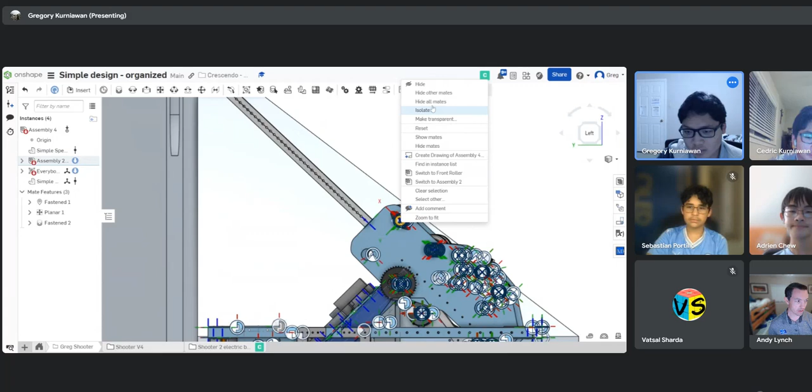Different. Wrong one. Yeah, it's the pointing pole.

Here's the sketch I was working with before. Essentially, I guess I should explain the whole idea. Let me open the other tab. Sorry, the CAD's kind of a mess right now, but I'm slowly figuring it out.

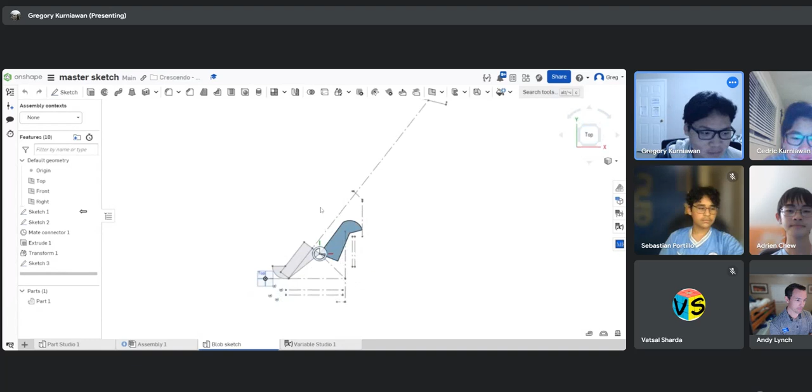Here we go, here's a blob sketch. This is something you said, Mabe. Essentially, we're gonna intake the note up, and it's gonna go to the shooter like we normally do. But now, for the amp, we're gonna hold the note inside the indexing part of the shooter, flip the shooter around, drop this hood down, and then spin the indexer the other way to spin the note into the amp. That's our current plan.

So that's the video of PantherBots shooting the amp? There's a lot of videos now of a lot of people shooting the amp. I think Belair is also trying the amp, I think.

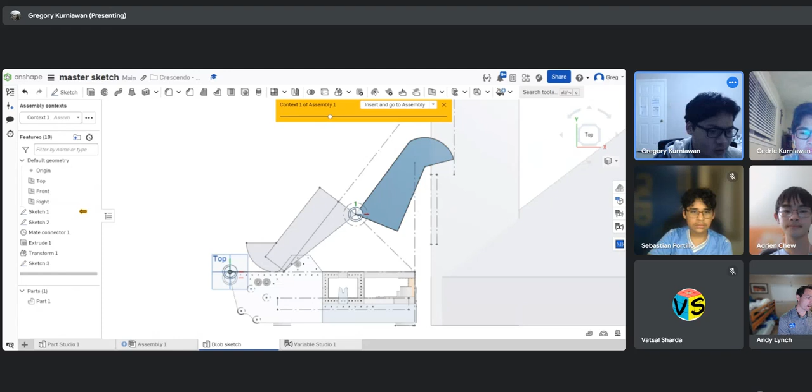Yeah, it seems like you can do it. We don't have to necessarily have a slow index, but okay, cool, I mean, looks like a good plan.

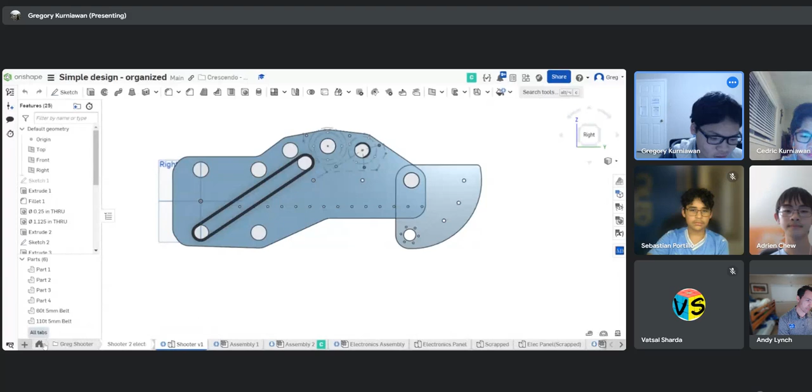Yep, I'm still working on the plates and stuff. From my just looking at it, it looks like it's gonna work. So that's good. Where is it?

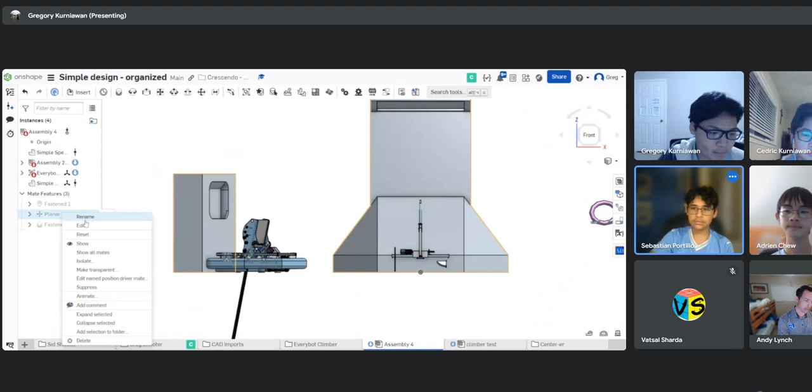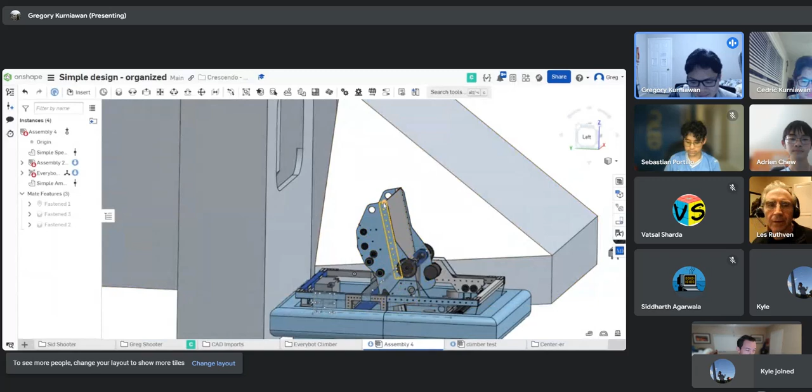This is the old pivot, so I haven't finished the new pivot yet, but just from the height I'm looking at, it should work, and also from the length, it should work too. So yeah, slowly working. Doing the belt stuff has been an absolute nightmare, but that's okay.

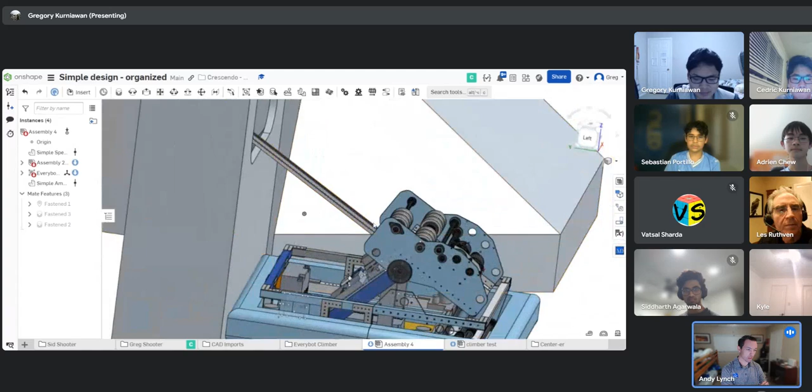So is that stick pointing towards wherever it's shooting? Is that the idea? Yeah, that's it. So can you zoom out and show us the shot into the goal?

One second, let me. I guess we should call it the right name. It would be the shot into the speaker. Speaker shot, yeah. That's correct.

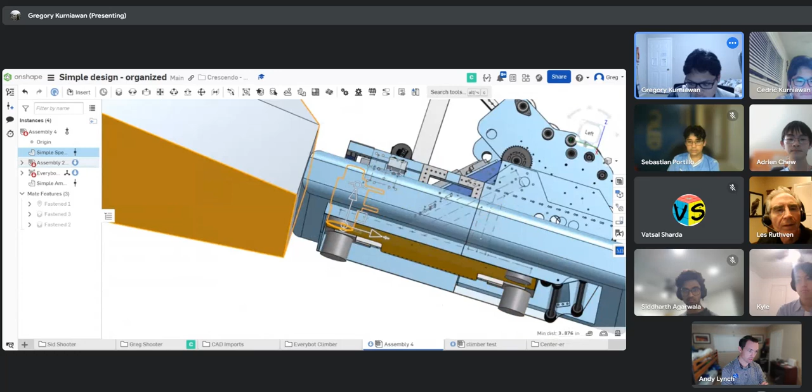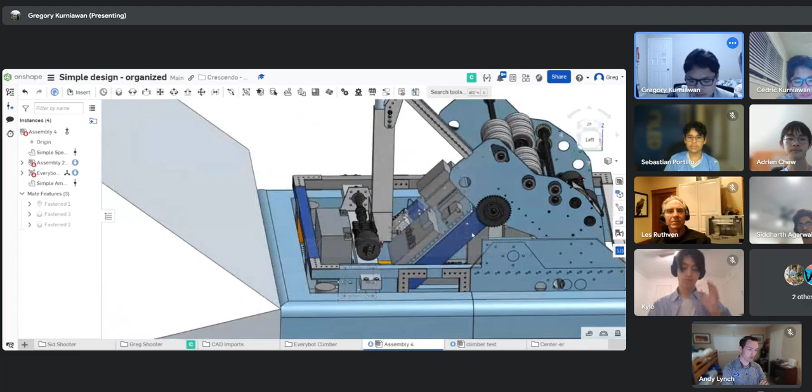Something like that, like I said, this is still the old pivot. I have to move the pivot up, probably flip it around. So yeah, it's been kind of a nightmare with the way we have to turn, basically like past 180. So I have to turn like this in order for us to do the amp stuff. So I have to flip this pivot around.

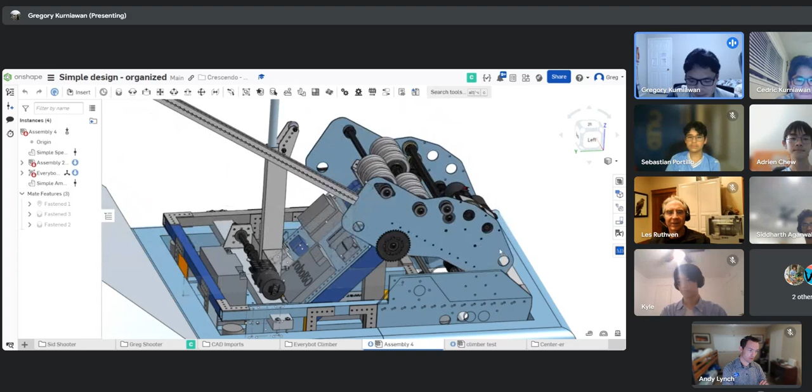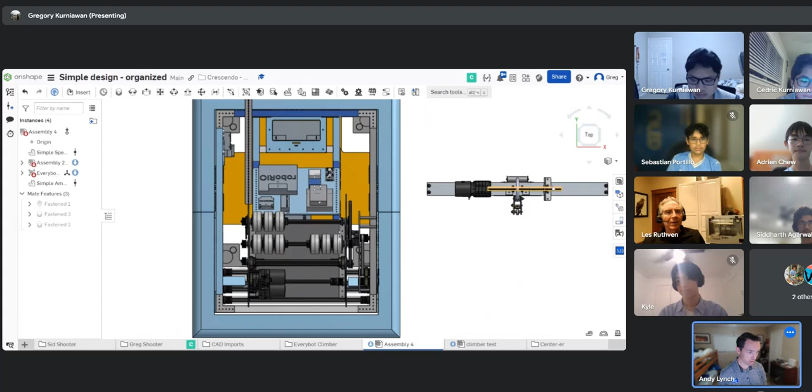Can you do a top-down view? The climbing arm is going to be, probably, I mean this is just from Everybot, so probably gonna be somewhere right here or something. We have all the space on the side.

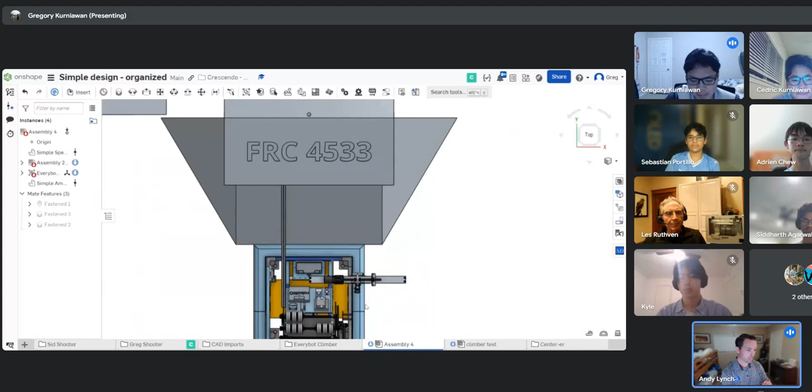There we go, 92, is that the plan? I think that's the plan. Yes. It's actually pretty similar to the Panther Bots where they have the two climbing hooks. Maybe have hooks on both sides, just like they do. Yeah, I think for most it'd be in the middle, or I think it'd interfere with the shots because the pole itself is already really huge.

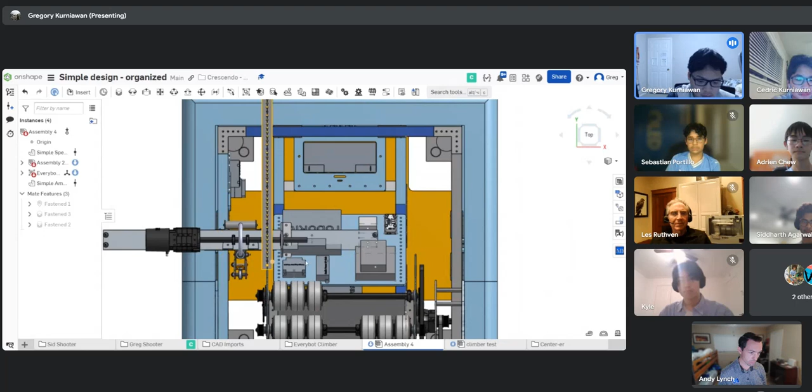See, I think we can do it in the middle. Besides, it's a bit more stable anyways. It doesn't mean we need to have two assemblies though, that's the crappy part.

There is a way for us to do it with a through-bore gearbox, but that wouldn't allow us to control the individual heights on the two telescoping tubes. I think we might as well just use one long axle, right? Yeah, we could just do one big axle with a coupler in the middle and a through-bore gearbox because we have 3 or 4 of those lying around.

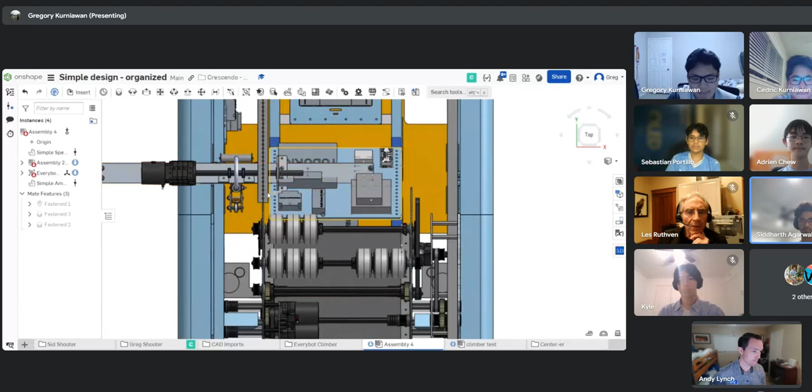Do you really want to? I thought maybe, yeah, that's the thing, it would reduce complexity, but it would not allow us to adjust for harmony hang. I thought for harmony you just pull up as hard as you can, and then that should get you as high as you can, right? Well yeah, it's just the Everybot telescopes, it's a single stage, so it probably won't get as high as some of the other elevators that we've seen.

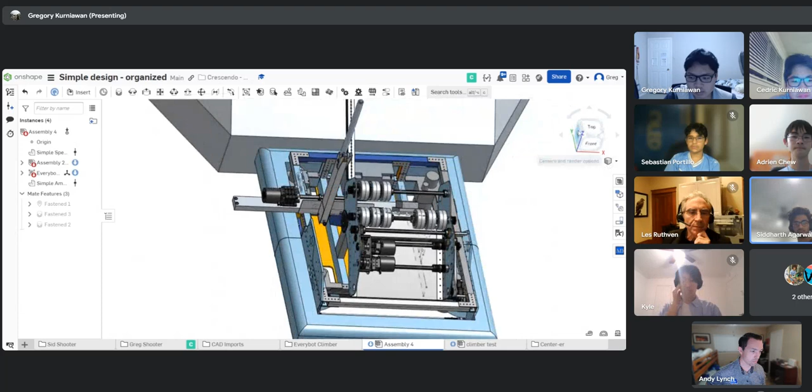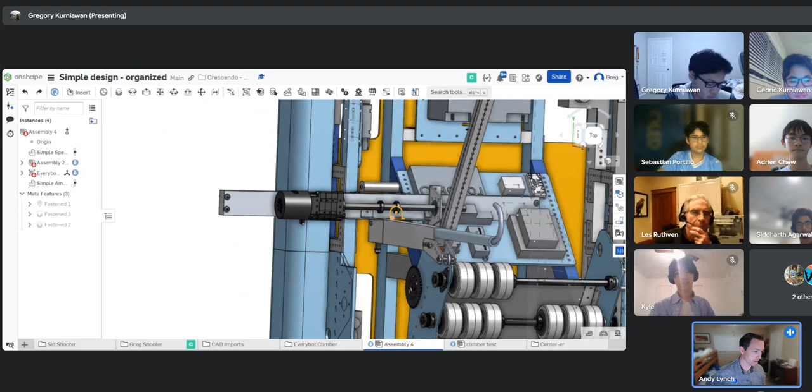Well, that would just package motors, each one, and then come up with a nice way to put the motor. Okay yeah, I think we should have space under the shooter for motors. Yeah, I say we just work on that packaging and try to get everything in there. We do a lot of shots like this where we convince ourselves we have to have pieces, bits, we have to do electronics.

This is actually building. We have to put this arm. That's step 2, yep.

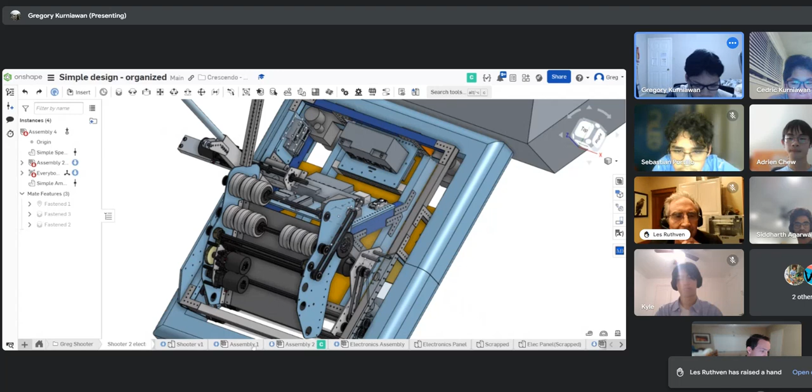Try something quickly. So you raise your hand. Les? Les, you got a question?

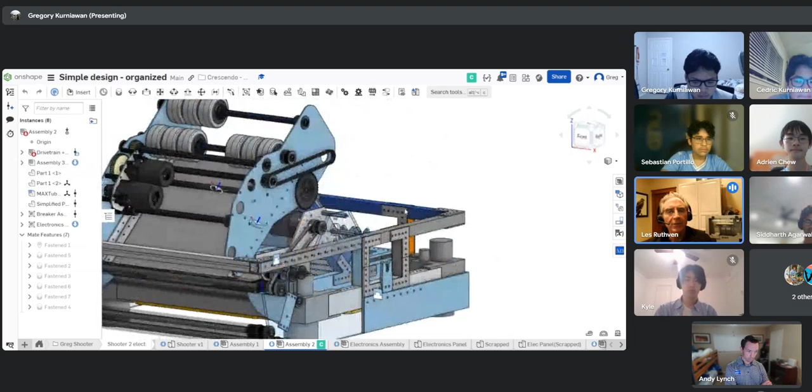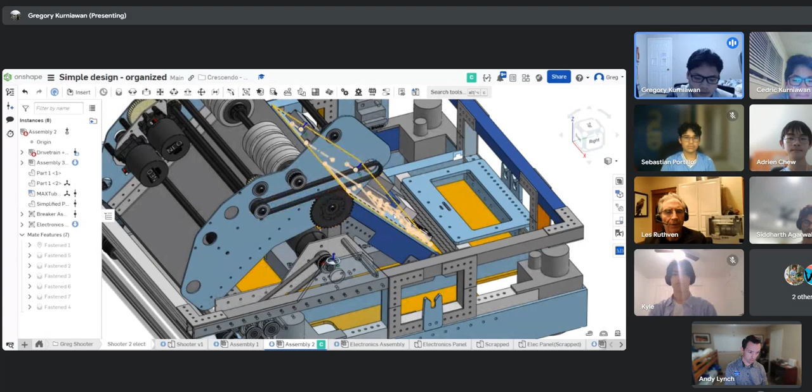Yeah, so it was about what you were saying, since you have to flip it over more than 180 degrees, the bottom has to go through the center. But if you move your pivot, you could move your pivot up higher or something. It does sound pretty complicated if you have to flip it over like that. And then right now the shooter has to go underneath your arm at the same time. So I was thinking the way I could do it is like move the bracing to the outer side of the shooter, right?

Because I think that's what Vector does, their bracing is just past their shooter plates. Okay, because otherwise it's going to interfere with your motors and stuff. The other thing though is if you move the pivot forward, then there wouldn't be as much stuff that has to go underneath.

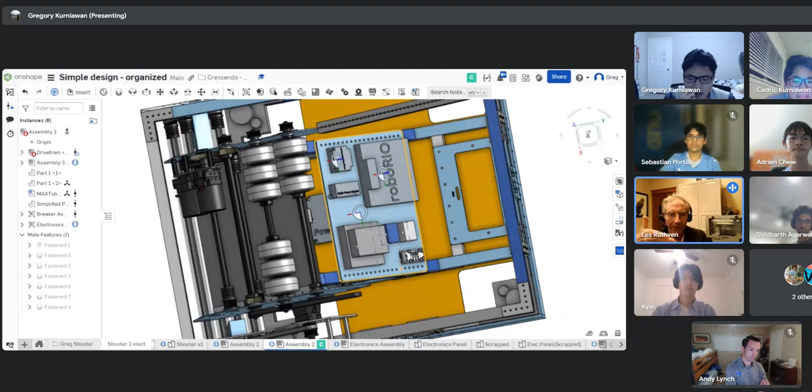That's also true, I don't know. Like you have that belt up front, if your pivot is where that bearing is, you have to be probably here. You see my cursor? Yeah, I see that. Up there, and then basically down here or something. Yeah, something like down there. Yeah, also possible.

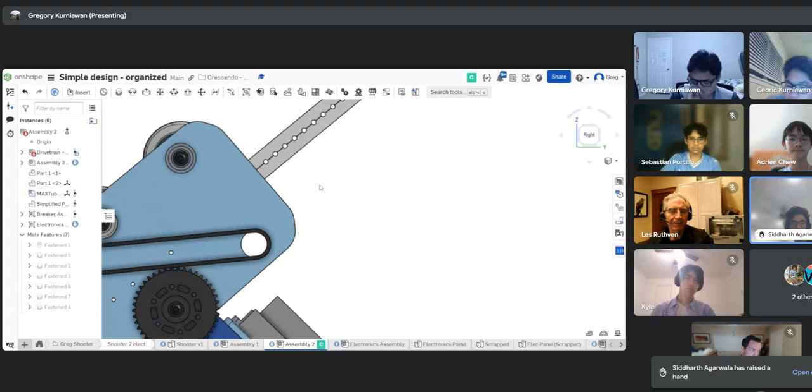What options are here? A quick question: do you think we could do the pivot superstructure on just the outside drive rail frames? Like the horizontal sides of this thing? Yeah, like have it, maybe not like on that, but up against that.

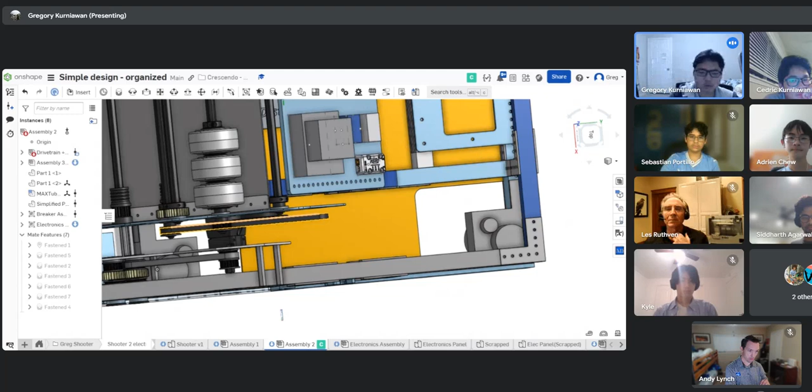I doubt it, because we're not just worrying about the upwards stuff, right? We're worrying about the bracing of it too. I'm not sure where you would put this, because basically the problem right now is it's very awkward. Well, basically, we can do half of it.

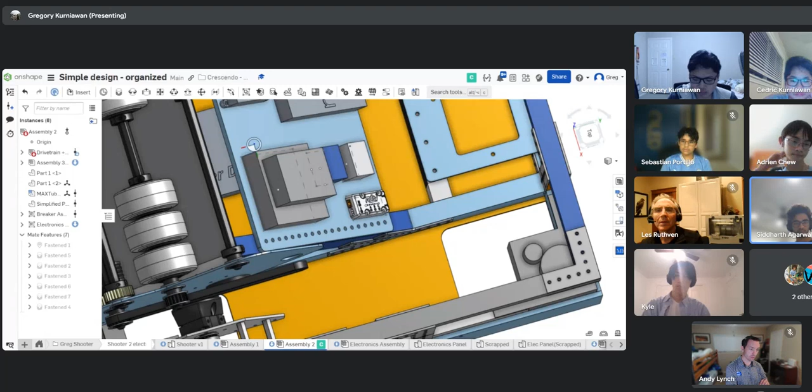What we can do is what we did with the EveryBot arm last year, where we had a gusset plate sandwich between two 2x1s, and they stuck together to the drive rail, and that was simpler, I guess, and pretty sturdy, and didn't really have any failure throughout the season, even when we fell a couple times. Maybe, not sure.

I mean, I think having a little modularity to take the full shooter assembly out is nice. If you get that attached to the drive rails, it might be difficult to work with. The bumper skirt is not very rigid, we'd have to do a lot of bracing to get that bumper skirt.

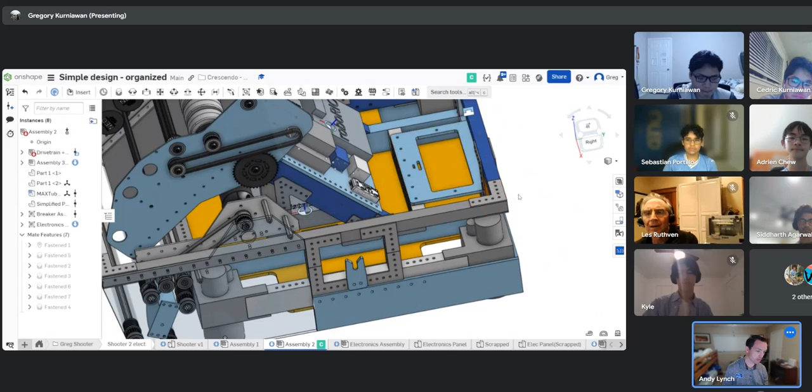Yeah, well, last year what we had was just to the drive rail, and the idea was to bolt it in, but we ended up riveting it because of time. And then we can just pull it off with like 8 or 9 bolts and take off the whole shooter assembly.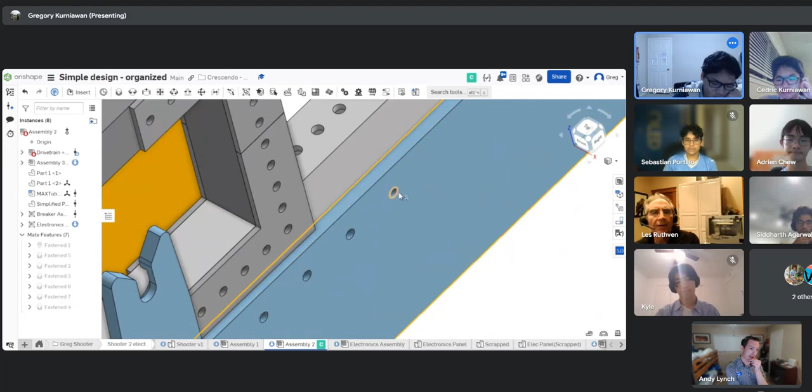The bolt head, if we do bolts, does the bolt head extend out of here, right? Not horizontally, it's vertically bolted in, and then there's horizontal rivets that we can just drill out. Vertically bolted in, I'm not sure.

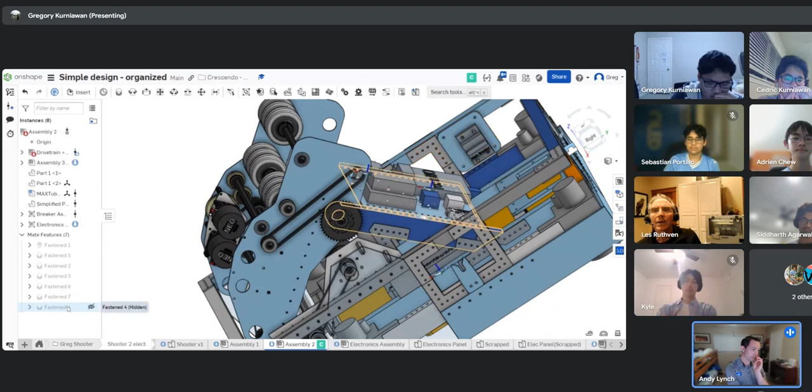Back on the pivot. Hello, pivot. I feel like this is really an important part of what we're doing. Where we put this - it seems like you guys are really set on putting it close to the middle of the robot. Seems like the pivot should be much further back towards the battery.

Oh yeah, no, I'm gonna move it. This is an old sketch, a geometry that I had from Saturday. Okay, so that - yeah, it's gonna move, but not this. No, it's gonna fit, yeah.

Well, we should kind of figure out which way we're going. How is it? Yeah, one more thing on the bracing.

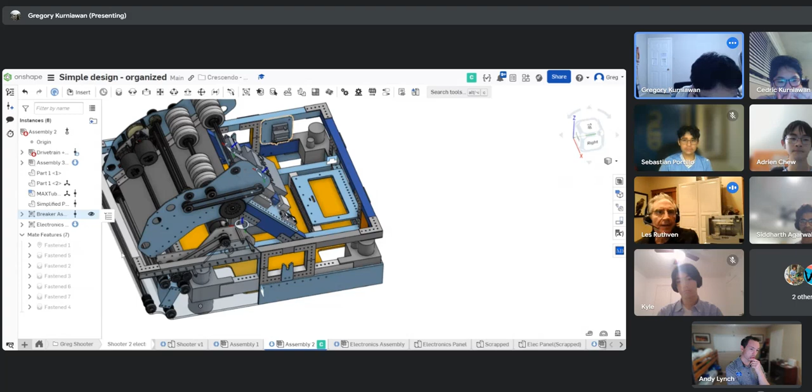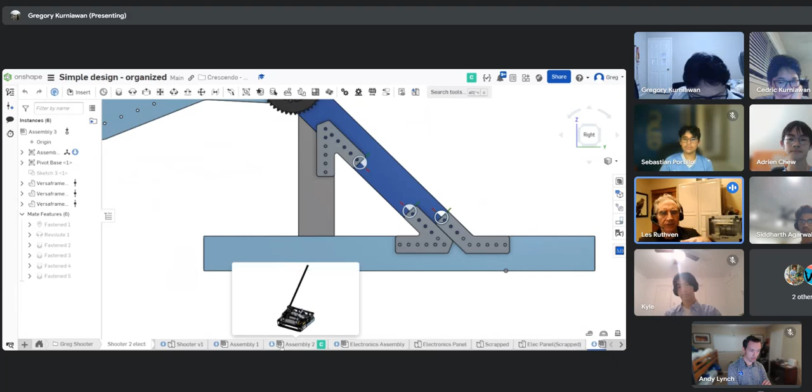In 2022, with our climbing robot, we had a 1x2 tube on the inside. So we had 1x2 rails around the outside, and then we had 6 bolts that would attach the upright to it. So it would basically be 1 inch inside the perimeter, but it was enough to hold onto the robot. We never fell off or anything.

So that's when we were climbing to the traversal and stuff like that. So instead of being perpendicular, we bolted it inside, so it's like 1x2 and 1x2, vertical and horizontal.

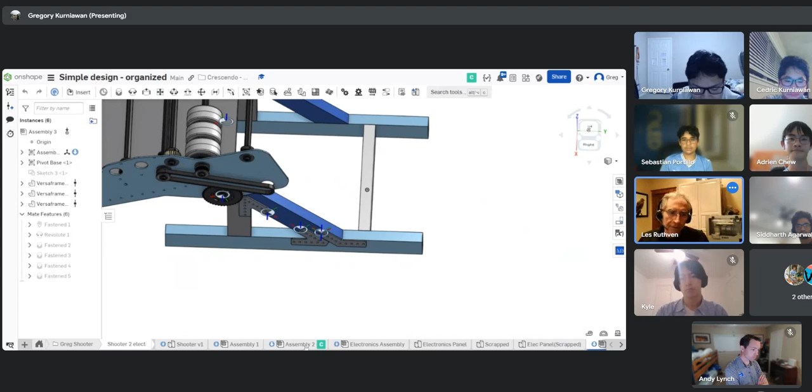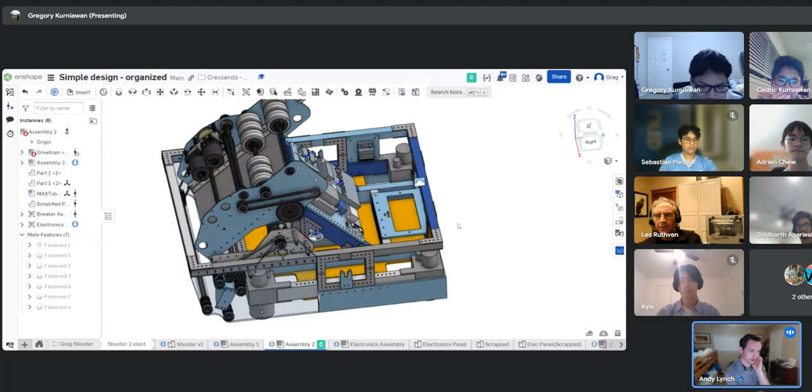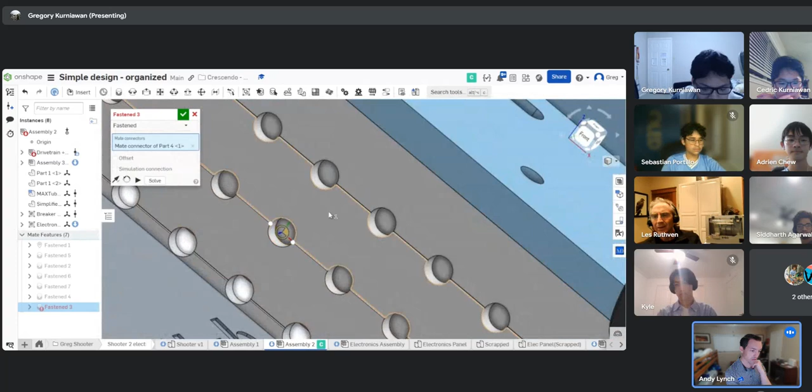I think instead of putting Greg in the hot seat on CAD, clearly there's some more stuff that needs to be done. Let's just talk generally about people have problems with what direction we're going, so we can think about those. I don't want to have to fix all this right now in front of everybody. So let's think about what other big items - how we mount the rails is important, whether we're mounting to drive rails or to the cross brace rails. Position of the pivot is important. I think all this should be sketched out, and we can all generally agree this is a good direction. Everything's going to happen before we sink lots of hours into the CAD.

Yeah, you gotta, we have that.

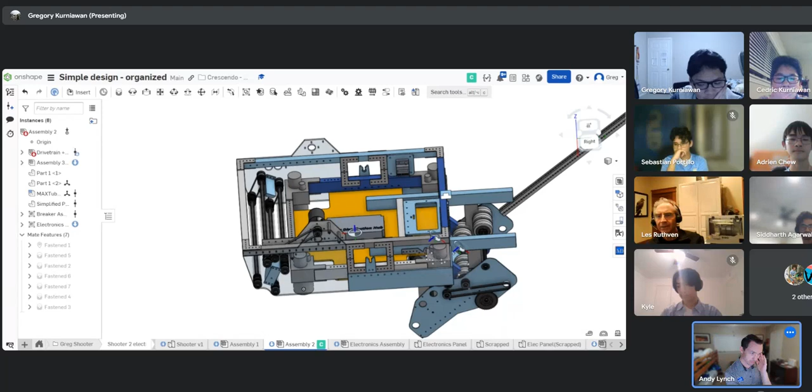Okay, I mean we could start thinking about bumper mounting. The thing that's in the CAD right now is super old and they haven't really changed it yet. So yeah, I think let's get to that in a moment.

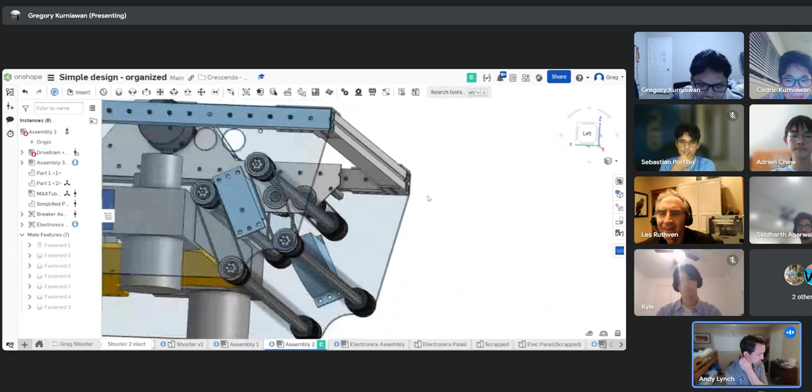I think it's pretty nice, it just needs some centering, but I think Lamar is working on that. The wedges that I have in there, I think they were from one of Spectrum's prototypes, but they didn't really show it well. We printed it out on the west side, we just forgot to bring it on Saturday, but after having a look at it, we don't know really how well that's gonna work.

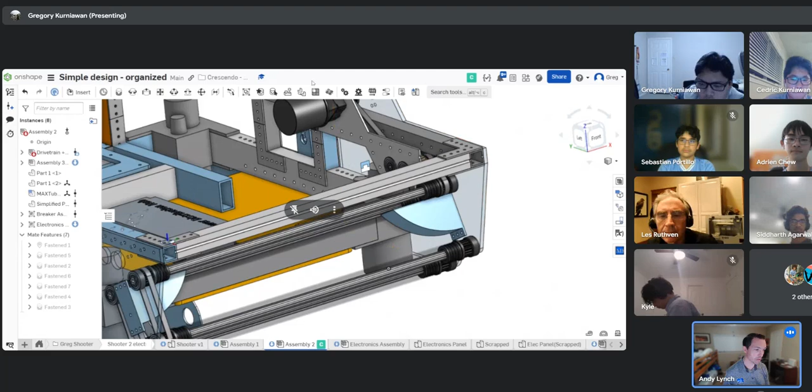But yeah, sounds like a great thing. Lamar has a different one, you can let Lamar just play around with centering. They've got an intake, so we're pretty much keeping the general geometry. We're happy with it. I think so.

I was a little concerned with how it was, it felt like it was really bogged down when we tested it. I'm not sure about, maybe it's the compression of the note or something. It sounded like it was hurting a lot. I was struggling to take in the note, but I'm not sure how to fix that.

I guess I still don't. I don't hear the same thing that you do. I hear like a big, I remember when we were testing, I heard like a big scrunch, and then it started moving again.

I don't think anyone really spec'd out the motor that was put on there, I think it was just grabbed and installed. So that's kind of a minor detail that can be messed with. I'm just wondering if that's just the motor part, or if that's some other part of the assembly. I'm sure we're just overloading the motor, it's hard to turn all those rollers, especially with the amount of compression they put the note under. So we just need more reduction or a higher power motor.

Okay, yeah, I mean we don't even have grip, so imagine if we put a little grip on this, it's gonna fly in there. I don't think the intake's got major issues, we just need to keep testing it.

I think one thing we can probably look into is some poly belt on the back rollers, just because there was an issue where the note would kind of get tucked under the back roller because it's too high. Yeah, there needs to be something backing it, there needs to be like a backer at the back of the intake, whether that's polycarb or just some poly belt running between the two rollers.

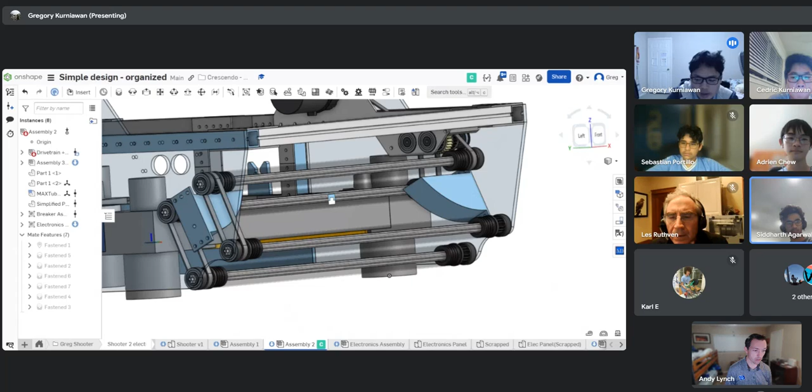Because it doesn't really matter, the current way it intakes is it hits this, I'm gonna hide this thing from Cedric. It hits like the center of the note and ends up behind this back roller, and then it gets turned back out a little bit and back over it to be intaked up. That's why we need a backer on this back set.

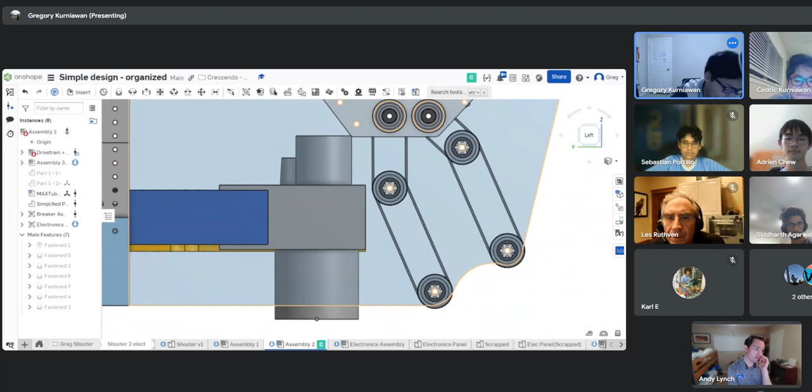Yeah, so definitely add that, that's important. Yeah, I think just testing, we'll let Lamar just kind of play with spacing and maybe motors and see if we can get this thing to be smooth. I think everyone's generally happy with this, we're not going to change much of it, it's minor changes.

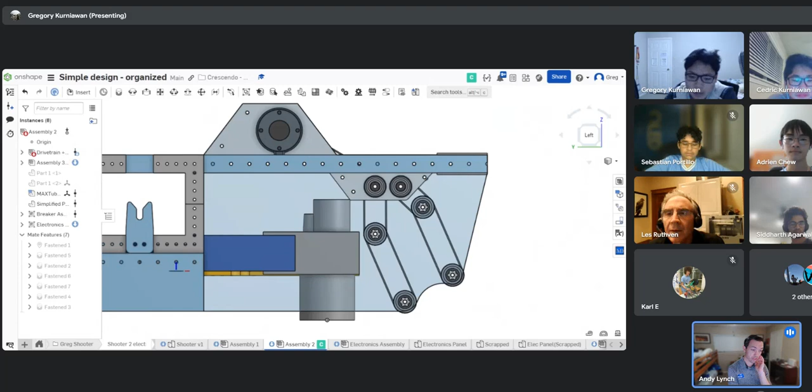So moving that intake into the shooter wheel, let's just generally look at the shooter.

So as we transition from the ground intake into this, if you look at a few of the different designs, like CanterBot's design has some pretty big compliant wheels, like almost 4-inch compliant wheels. And so if there's any wiggle room, it kind of is the cushion between the handoff, between the ground intake and the shooter.

I think some other teams have belts and other stuff, so we probably need to figure out what works and maybe look at some working videos of teams that have it properly handing off and take inspiration from that.

I think the biggest takeaway from most of the handoff videos I've seen is they have full control of the note, like no part of the note is still touching the ground when they hand off to their shooter, or their shooter's just always in the position to intake when it's intaking so that it just goes in. It's like they have one static position, like PantherBots, their arm is all the way down all the time whenever they're intaking.

Because otherwise there's no way for the note to make it into the shooter itself. I think the closer we can get with this shooter, even if we don't have our pivot and all the details figured out, we really want to work on just fixing a prototype shooter to the existing ground intake and having them hand off to each other, just so we can test all that out.

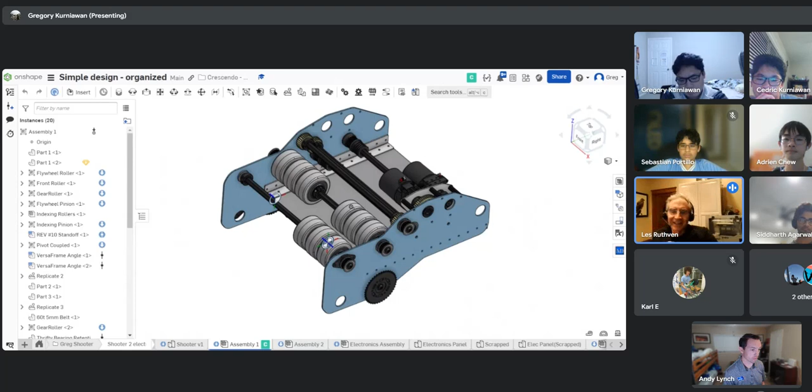Right now the plates are 0.1 because I thought we were going to use the aluminum that we had. We'll probably cut them out of acrylic just because that's what we're using for testing. But these are the 3-inch wheels. And then we'd have to have a polycarbonate plate behind it, so we could try that.

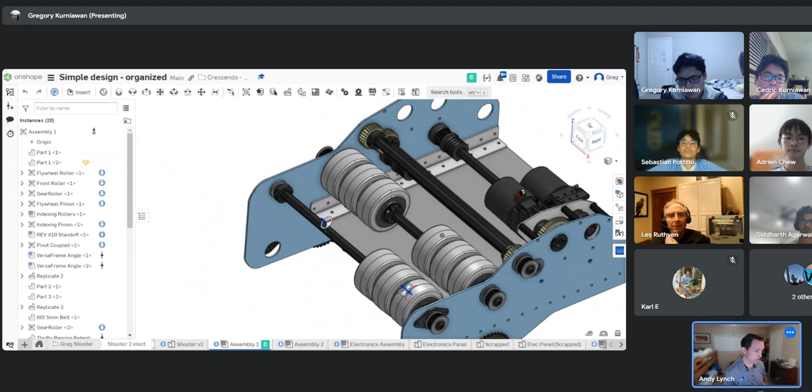One thing to think about, Greg, you might want to just mock up a quick note in this to get the whole ring. Because as you pivot this, is the note going to still be attached to the ground intake as you move it? I see what you mean. Yeah, you might have to make this longer.

Yeah, this is already... I think this is 10. I think what we spaced out last time was the indexer was like 10 inches long, something like that. So it's going to stick out a little bit, or that was another concern before. So we'll see, because it has to reach the ground intake too, right? So I think I have more space now. Ground intake holding onto this thing as you're pivoting, you have to have the separation somehow.

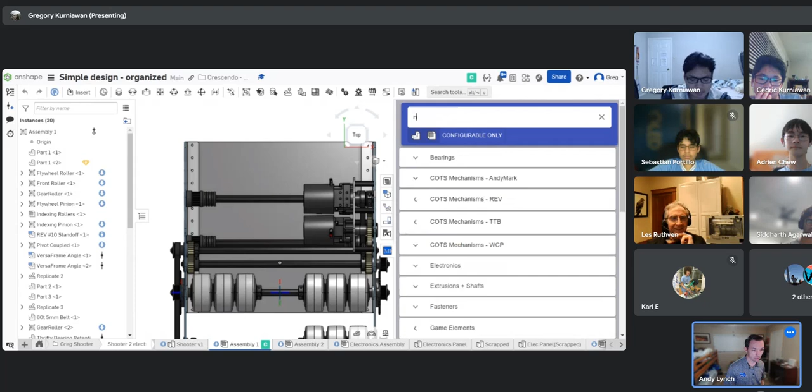Yeah, it's going to be like here, which is not ideal. So I guess I'll make it longer. That's fine. So it works better for the amp, anyways.

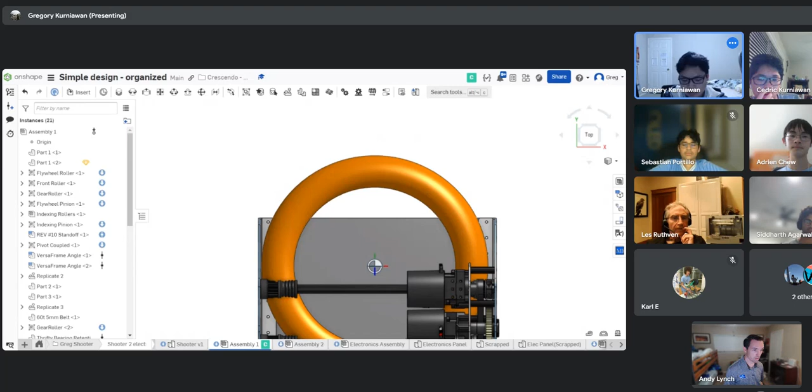I think you really want to make it so that, because we want it to be in the shooter, we don't want to do any motor controls on the ground intake after it's taken off. Yeah, okay, everything should be off, essentially. We just fully give it away, basically, right? Yeah, right. Okay. If we get it jammed or something, it'll be trying to force this territory.